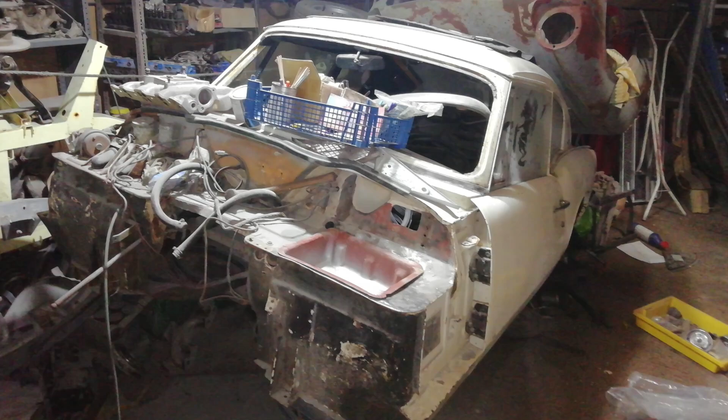However, in the last couple of episodes we've got it stripped down to a bare shell and it's ready to actually do some work. Now, this car has been off the road since 1983, and when I saw it first, the body was off the chassis. Chassis was stripped, engine was somewhere else in the unit, and the biggest problem to start with is that it's been sat on its floors.

It's been sat on some stuff that was underneath the floors all that time, so they're a bit bent. Now, the first thing I want to do is try and get those straightened out, then assess what actually is going to need cutting away and perhaps replacing. I really don't want to take the main floors out, and I don't think I'm going to have to. I'm getting close to deciding I'm probably going to have to take the boot floor out. But once we're happy with those, I want to lift the body off the chassis and check the chassis for straightness.

I don't really suspect there will be anything wrong with it, but as we're at the stage, let's just start, check against the workshop manual dimensions, and start from a clean slate. Then get the body back on and start to build up the rest of the car. So let's get started.

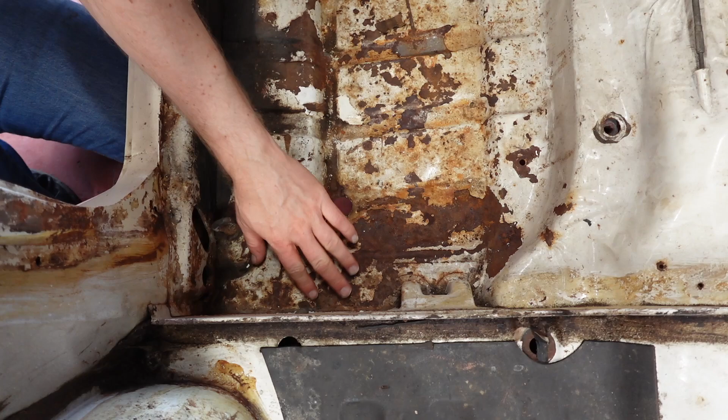Okay, so can you see what I'm getting at? There's clearly been something under here with the weight of the car on it, so I want to try and bring this back down somewhat. I'm not concerned about any of the actual structural bits because this all seems fine. That's a huge chunky piece of metal, so that's keeping that in place. But we've definitely got a bump up in the floor. Similar on the other side, and then in the boot too, and a little bit in the far corner, the other wheel arch. So I'm going to hit it with a hammer and see where we go.

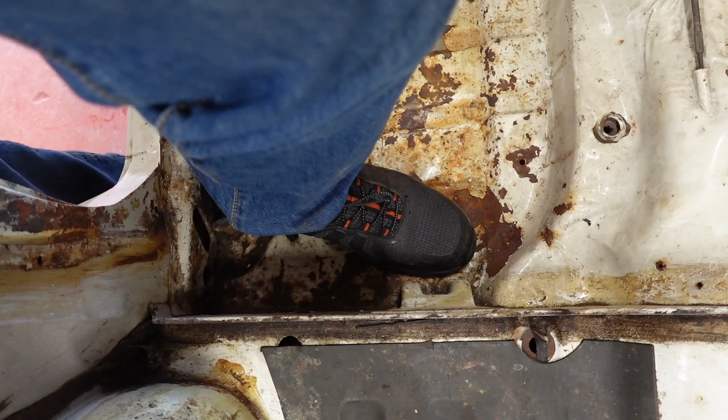I've already done a bit of this sort of panel beating, which has definitely shifted things.

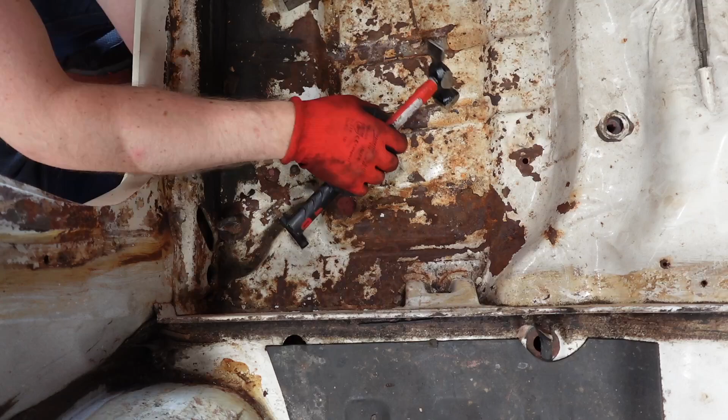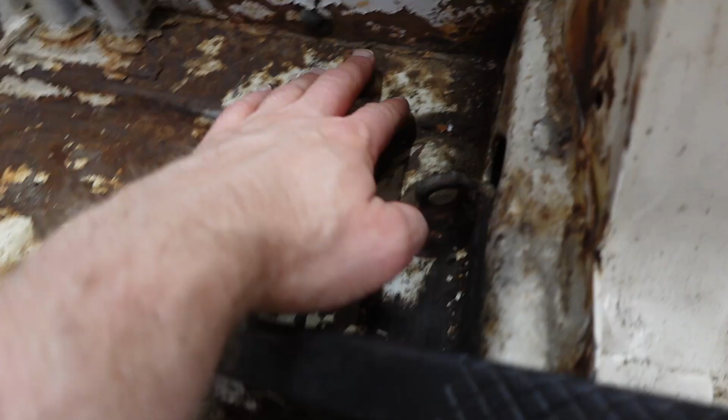So this seems to be going okay. That's flattish, I've got this down. That's looking flat. I think this sort of corner could go down a little bit more.

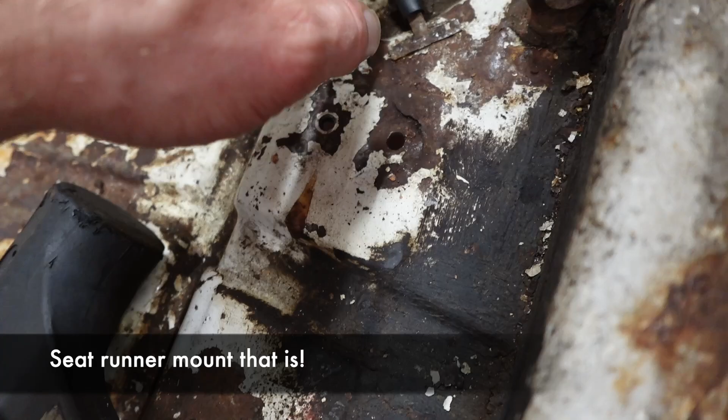Definitely knocked my way to finding some more repairs that need doing - the seat runner mount and a little bit here on the rear floor. This is where there's like a bracket underneath, you see, dark, which I believe is something to do with the paint lines when they were being produced, like an earthing strap or something like that. Anyway, there's a bit that's gone around there, but it's going alright, I think, which is good. Remember, these are floors as well, so if they're a little bit bumpy, I don't care. But I'm kind of hopeful that everything can be just restored to its acceptable level of flatness.

Mostly what I'm concerned about is the seat being able to sit in the right sort of place, and obviously nothing springing apart when stuff gets cut. Because I can feel this wing has been replaced at some point, and I can feel there's some repairs underneath. I don't like the way the sill is a replacement as well. I don't really like the way it fits. It's too far in, and also there's been repairs.

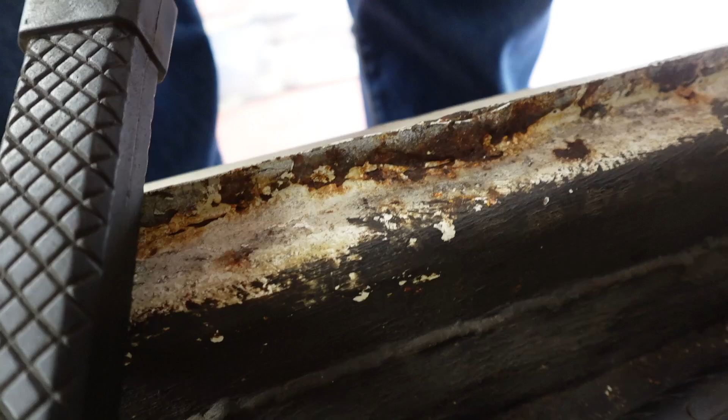I don't want to leave them like that, because who knows what's underneath. Generally, the standard of repair on this car appears to be pretty good, but I'm not taking any chances. So it's looking like I may want to take the sill off and redo some of whatever's happened to the inner sills and the edge of the floor and all that. Anyway, I'm going to get on and keep bashing.

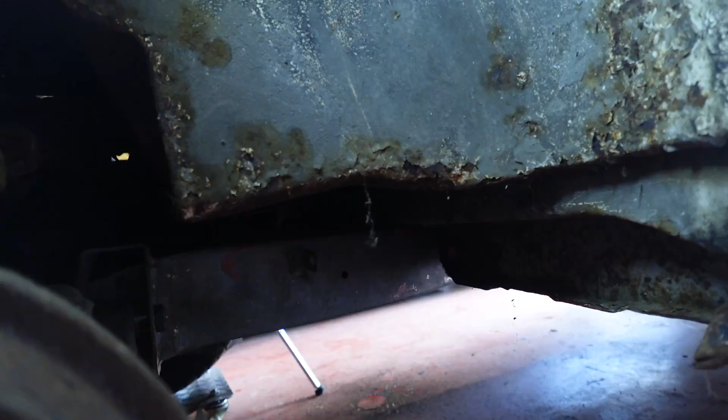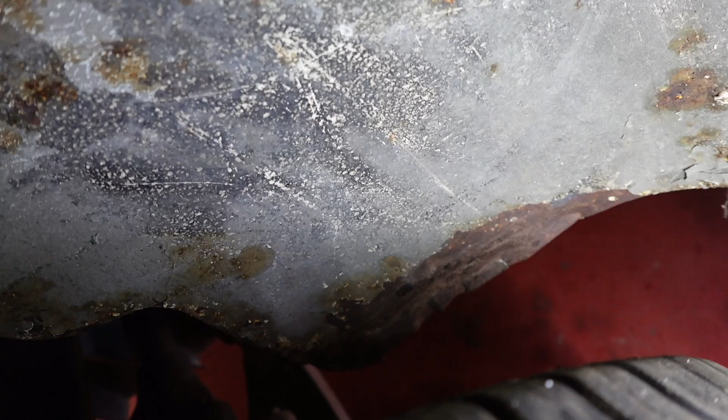Car on the ground, but I've got that sort of straightened out. I think I'm just going to replace the outer bit because it's just going to be easier. And you know, still, it's looking all right everywhere.

That's come up okay, quite nicely really. Got this floor done. It's a bit wobbly back here, but perfectly acceptable for a floor. I think I might preemptively replace the rear edge of the floor, because given it's rusty on the outside and there's not a lot of sealer left, it's going to be rusty in that joint. Probably worth just doing it.

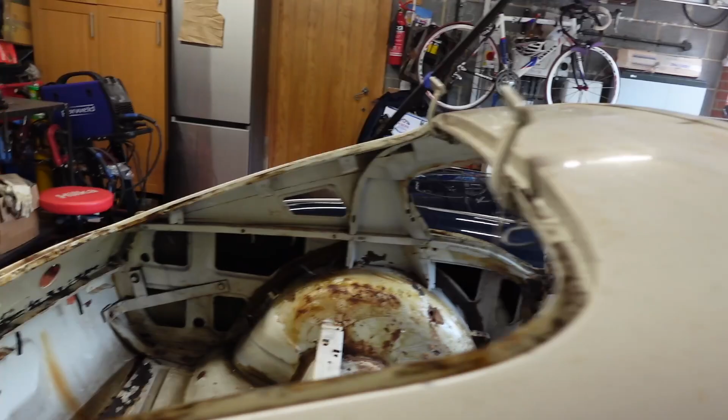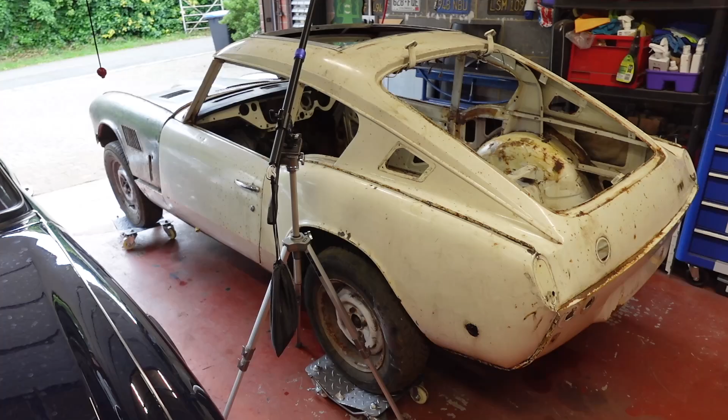Anyway, I think my next challenge is going to be to lift the body. I'm hoping I can do it with the crane. Still mixed on the boot floor, I'm leaning towards wanting to just replace the panel, but still time to think about that. So it's going to be shuffle the Spitfire outside and see if we find some points to strap the body up and pop it up. I think if I'm going to do that today, I'll just try to lift it a bit, because it's going to have to come off. I'm going to have to sit the body somewhere, do all my chassis measurements, and then put it back on, because there's no way for it to sit for any elongated period of time. So I'm going to work up to that.

Actually, I was surprised at how well this bitumen underseal, or whatever it's called, sound deadening came off. Just a bit of warmth with the heat gun and the scraper slid right under and it all nicely peeled off. I left most of it in place on my Spitfire because it had been painted over 300,000 times and didn't see the need. I may even leave that bit in the corner. Probably wise to check underneath to see if anything's rusted, because that had.

So I've got the crane out. Now what I want to try and do is lift the body off the chassis. I don't have a lot of time today, it's just a Thursday afternoon, so I'm not going to get to do a huge amount. I want to see if it will lift high enough to clear the chassis without hitting any bits of the garage door. Let's see if this is going to work.

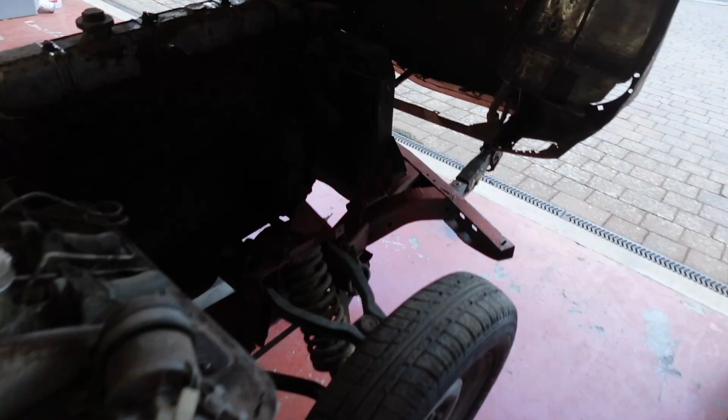Okay, so that works, which is great. I haven't tried to land it exactly in the right place on the chassis yet, because I want to lift it off again. There's apparently some repair needed on the chassis, but it could just be - I won't be able to see now the body's back on - but the end of this outrigger was split. So it could just be that. Obviously when the body's off, I'll be able to investigate that.

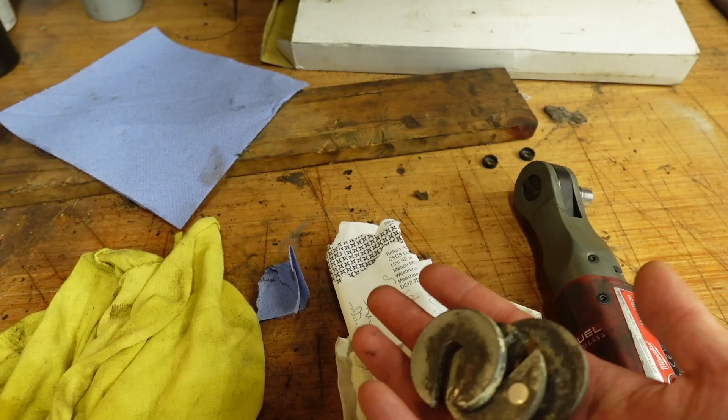I'll be able to check if it's straight, and then I've gone and searched through all the bolts I've saved or had new, and got all the proper body mounting washers. So I have the bolts. I've got a full set of what I need to mount the body.

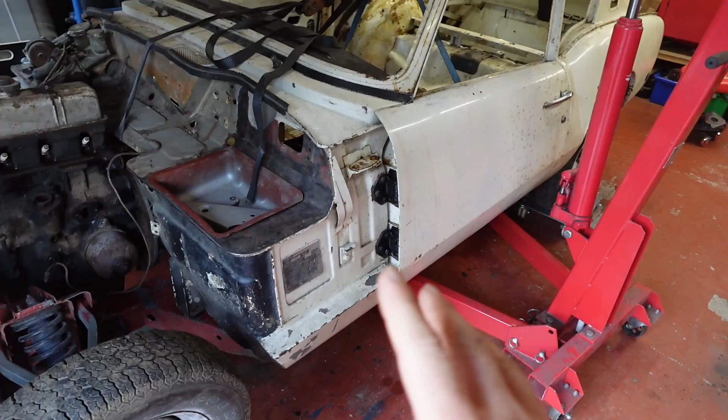So when I'm happy with the chassis, I will get the body properly mounted in place, and then we're going to know we're in a good state to actually start doing repairs to the structure of the body. Now obviously with the GT6s having the roof, they are much more rigid, so there's less of a worry. But having it on the chassis, if we know the chassis is good, we know the body is positioned as it will be eventually, then we know we're in a good state to start.

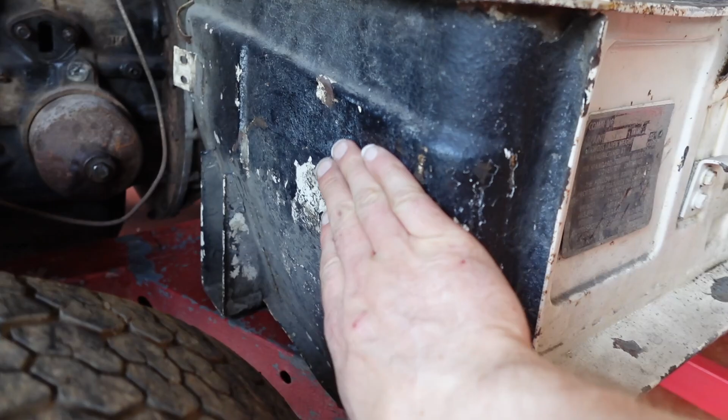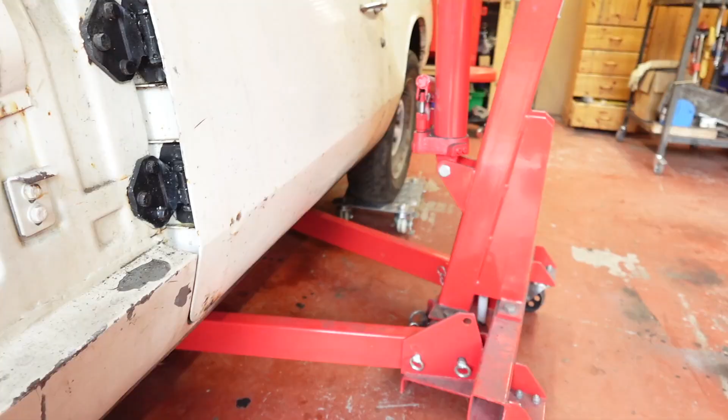So while I'm not going to get to lift this off and do all that till the weekend, I thought maybe I can come here, because this is badly dented. My guess for what happened here is that the trunnion broke, because that looked very much like the tyre smacking into the bulkhead there, which is what would happen if you snap the bottom of the vertical link where it sits in the trunnion. So I'm going to get the crane put back away and start smacking that with a hammer.

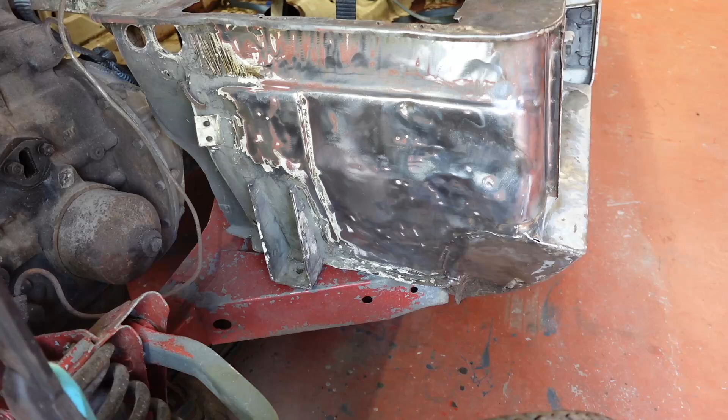Luckily I've got easy access to both sides. So I've had a go at this, I used one of the stripping discs, the end of one of the sort of poly stripping disc things, and then the wire wheel. I kind of attacked around here as well. I thought I found lead, but then actually there wasn't anything there. But the repairs are - I feel I'm going to have to cut it off. Don't like it. Problem for another time.

Anyway, so this is obviously quite pushed in, and I'm just going to see if I can bring it out. I'm going to try and block it with a rubber hammer, a bit of wood, and then move on to actual hammers and dollies to try and make the shape nice. There is a bracket in there which I would like to avoid removing, but it's going to depend on how well this kind of pops back.

Okay, so I got that out okay. Probably needs a bit more, but I have to clean up what's remaining. We're roughly the right shape, so it's going to be kind of trying to reintroduce that crease and flow.

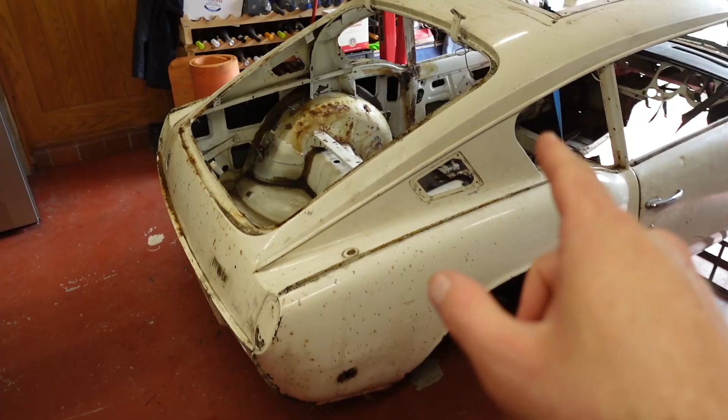Right, so that's off for the moment, sitting on some stands and a bit of wood on the feet of the crane. Only temporary, obviously. Now, let's have a look at the chassis.

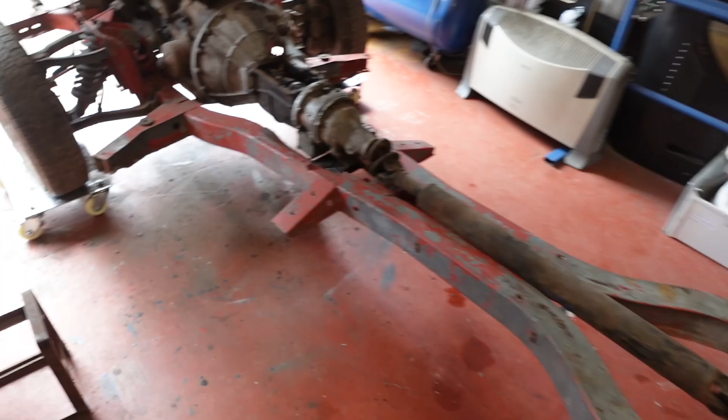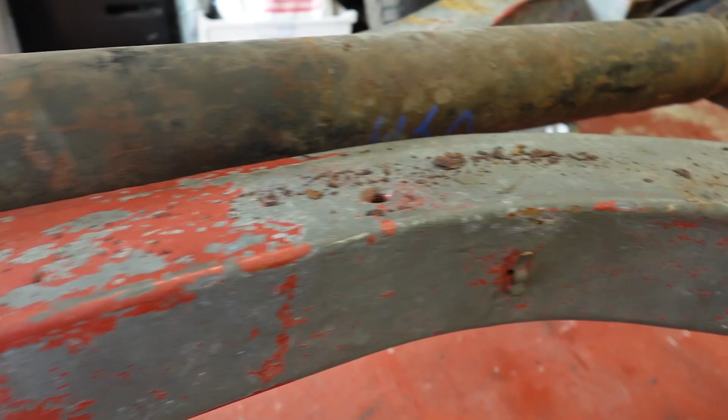I mean, it's all looking alright, which is what I expected. I thought this was galvanising, but it looks more like this was zinc paint, or just grey paint.

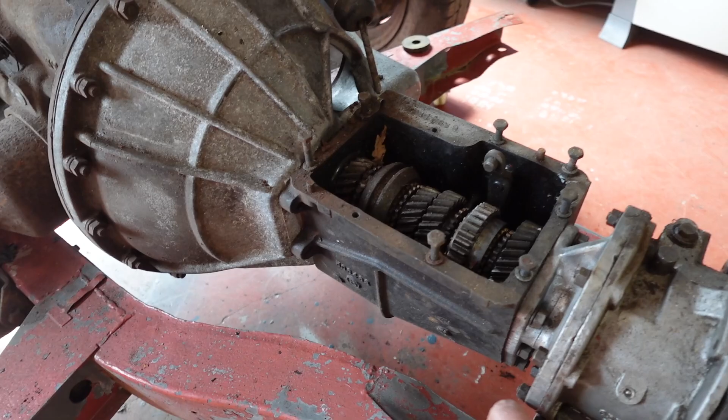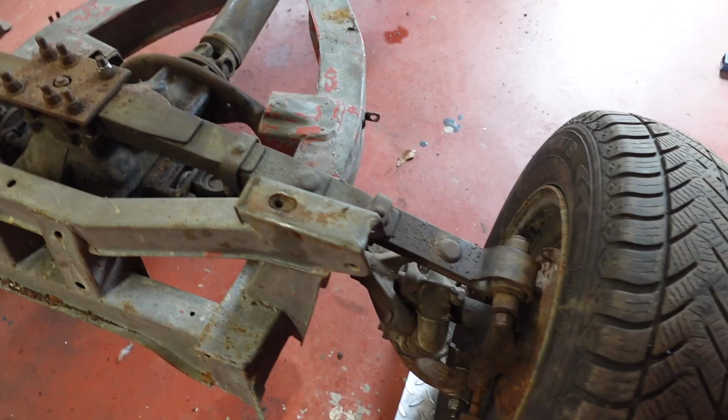Now the fellow I got it from did say there was a bit of welding to do on the chassis, but only a tiny bit. I don't actually know where he was thinking. Unless it's this, because that obviously does need doing.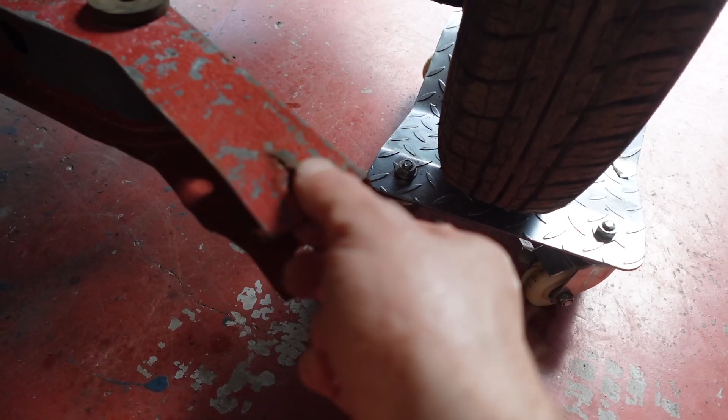Can't see anything else. It's missing a cross tube as well. Well, do they ever have cross tubes? It doesn't have a cross tube, just got to get one.

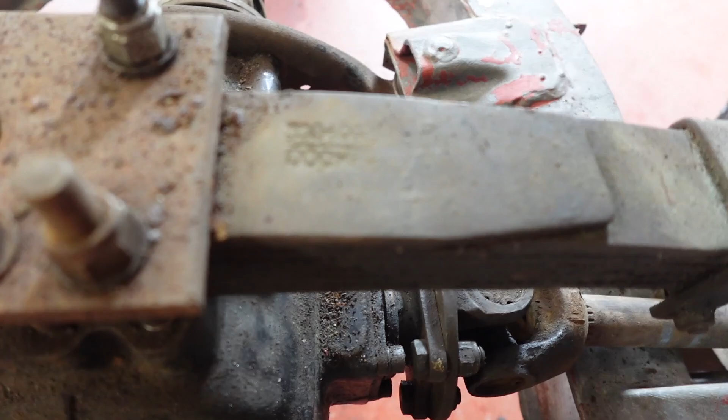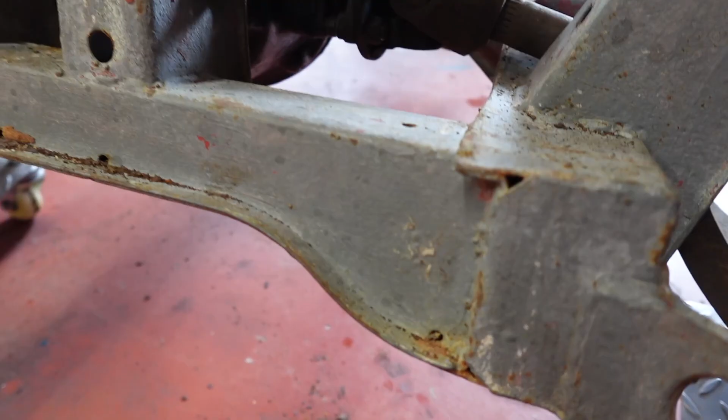There's some knackered looking Rotoflex. I wasn't planning on retaining the Rotoflex anyway. Going to buy a CV axle conversion kit, I think.

Well, I mean, that all looks fine. Let's get on with some measuring then.

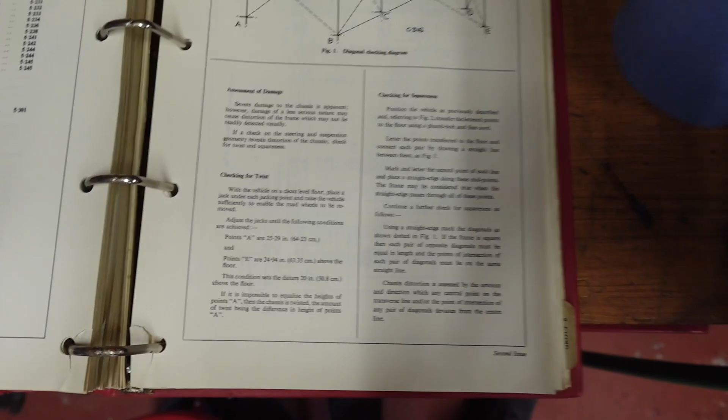Now what that involves is jacking the car up, and you can do this with the body on clearly, but we're able to take the body off, and it's going to make access to most of it a hell of a lot easier.

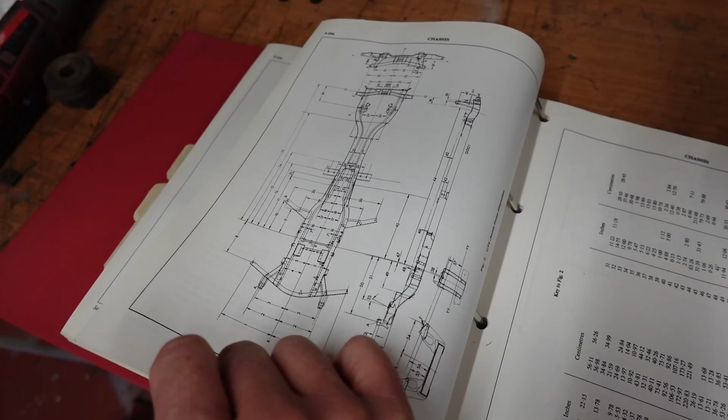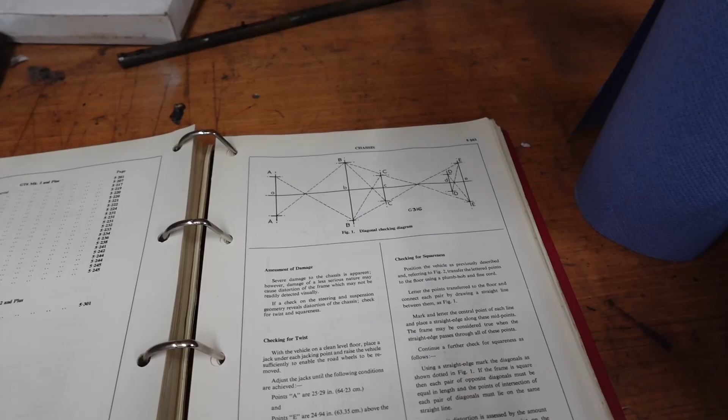Anyway, so jack the car up, there's some points on the chassis to measure, more clearly detailed on that diagram over the page, and then you're doing cross triangulation type measurements. So I'm going to get on with that. And I think I will film a bit of a 'here's how we're going', rather than, you know, watching me chalk lines all over the floor. See you in a bit.

Okay, so I've not got it quite to what's specified in the manual, but I do have it so the points you have to check first. So this and that are labelled E.

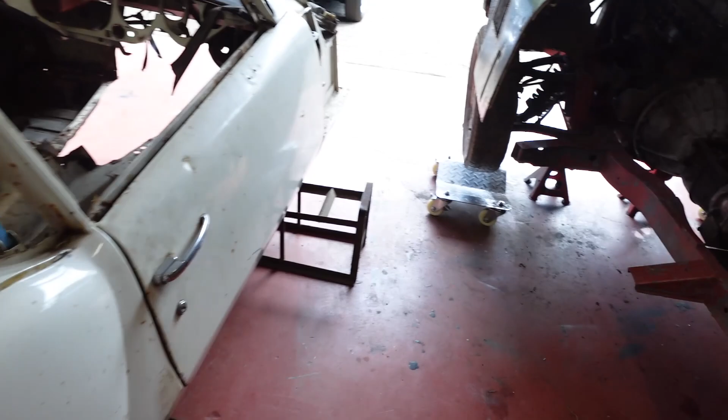In the centre of this bolt, and the equivalent over here are labelled A, and I've got those so they're equally high off the floor. Which means, while I've not got the exact measurement yet, it's not twisted, which is, you know, good to know. In fact, is that all they want you to measure?

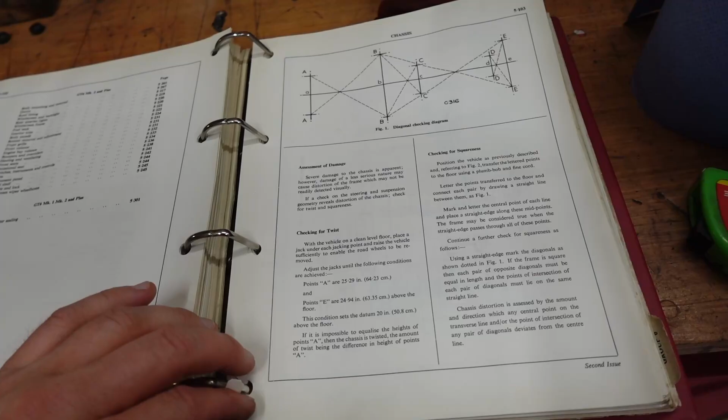Well, regardless, there's nothing to... it'd be better to do this check, whether that will be normal practice or not.

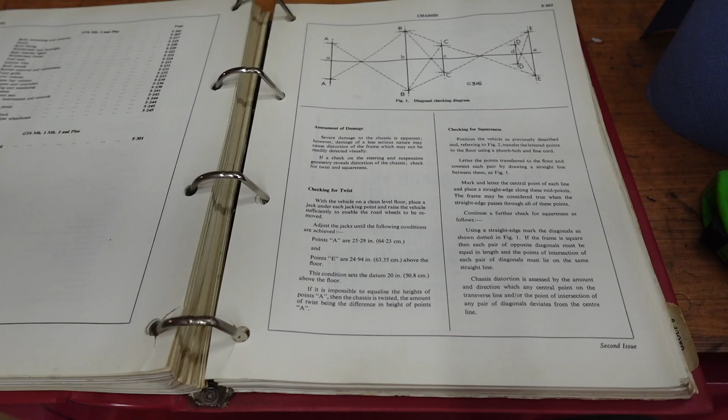So I'm going to work on getting the front a bit higher, because it needs to be. I've currently got 63.35 on the rear, and I need to get the front up. Front's about 58 at the moment, so let's see if I can get it exactly to match, and then go from there.

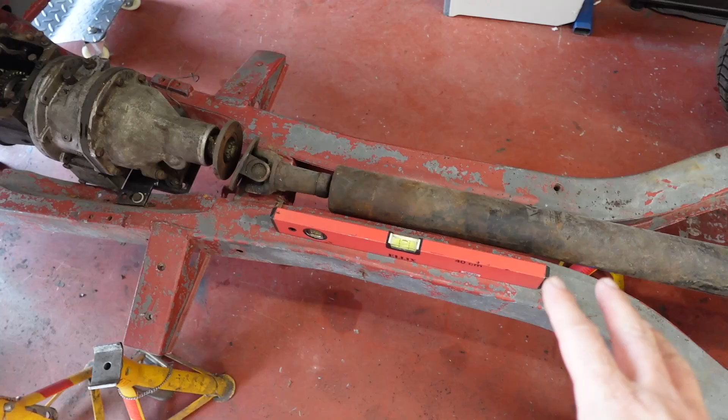Right, so I've got it right, and the reason I was confused - I've had the spirit level on the frame because it makes sense that for checking straightness it would end up level in the centre of the chassis, and it wasn't when I was following the manual.

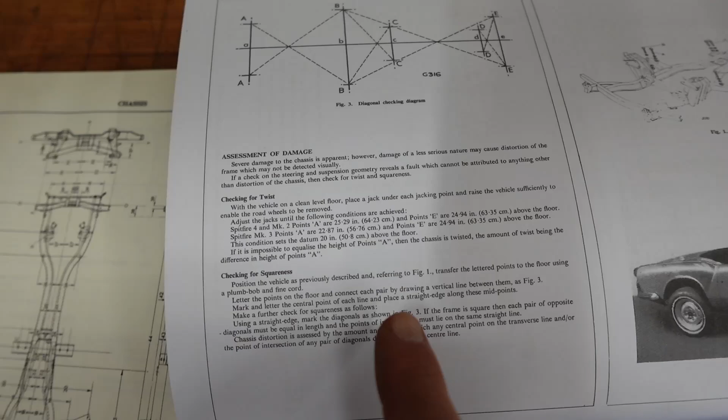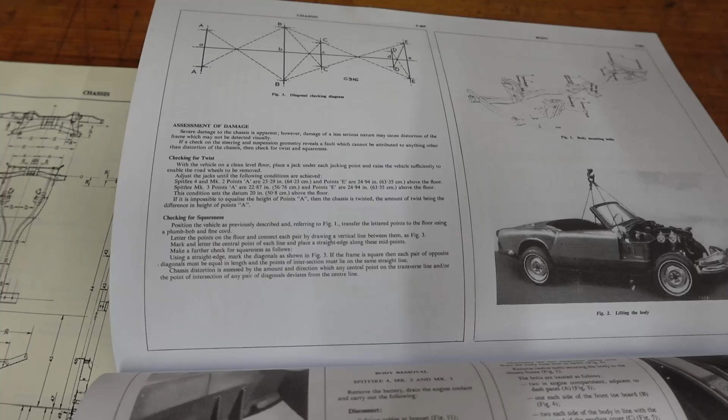I've had a look in the Spitfire manual, and it gives different dimensions for the Spitfire Mark III than the Spitfire 4s, which makes sense because the front of the chassis was redesigned to cope with the bonnet redesign. The GT6 manual I've got doesn't refer to that change, even though the chassis changed the same way. So using the Spitfire dimensions, I've got it right.

So I'm going to commence with drawing stuff on the floor. I've gone around and dropped all of these marker points down to a mark on the floor with a plumb bob, and then measured the centre line between them.

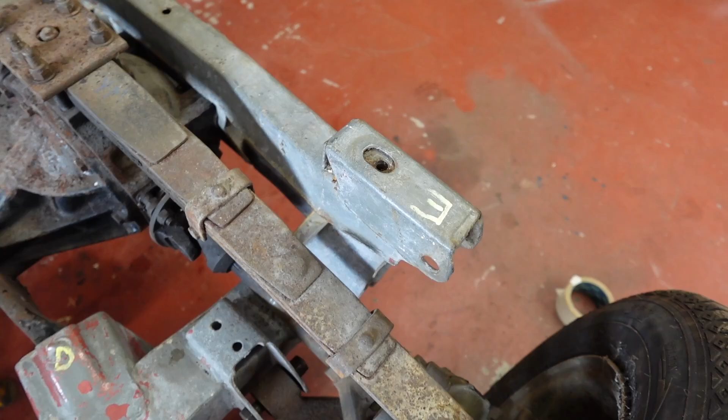So I've got this shock mount, strut top, or would be a shock mount - I don't think it's used as that on the GT6, is it? The centre of the diff bolt, the front diff nose mount bolt, this body mount hole, that body mount hole, the outrigger, and this hinge mount.

So I now should be able to lay a straight line down the middle of all of them. Okay, so within margin of error for using a paint pen, that outrigger is definitely twisted, and little bits of these have been pinched in as well, so I don't think I'm getting the best of measurements, but I'm getting an acceptable lineup, I think.

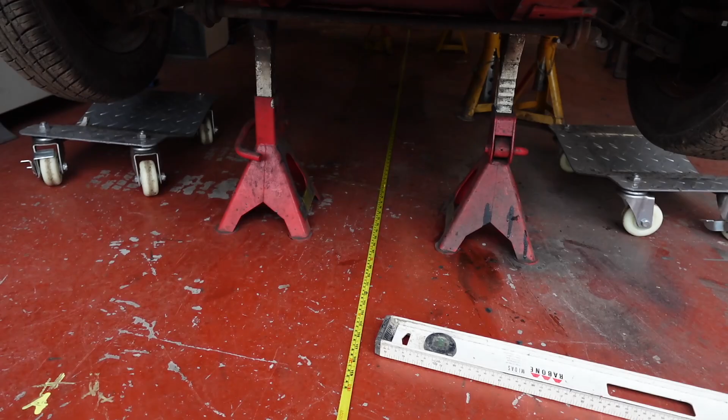Obviously I had no reason to suspect this chassis was bent, but as we're at this stage, I just wanted to check. So I'm going to go around and clean up all the captive bolts, captive nuts for where we're going to put the body back, then put the body back.

For the curious, before I put all this back together, I thought that was quite interesting to be able to see just how close the engine is to the bonnet, because this is obviously sitting low, sitting on the engine, but you can see up there at the front where the radiator sits and the radiator top hose, just how it fits in the bulge.

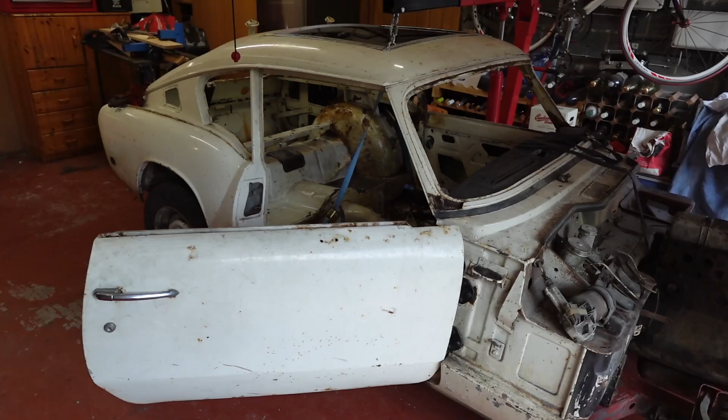Anyway, I've got all my holes tapped, so I'm going to get the body back on. And there we go, back on the chassis. I have got most of the bolts in.

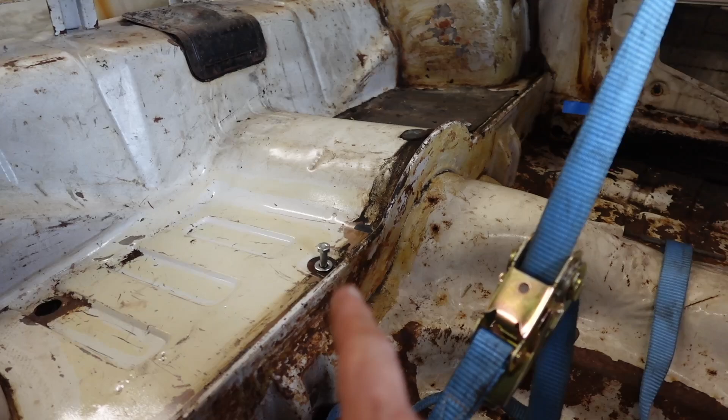I've got the front two, the rear two, which are the ones where the actual spacers go underneath of. I had a bit of a struggle with these two - probably because I forgot to tap the holes in the chassis, or re-tap them, because they just wouldn't bite. But I've managed to deal with them. I'm missing one for that side, can't get that one quite in, but otherwise I'm fine.

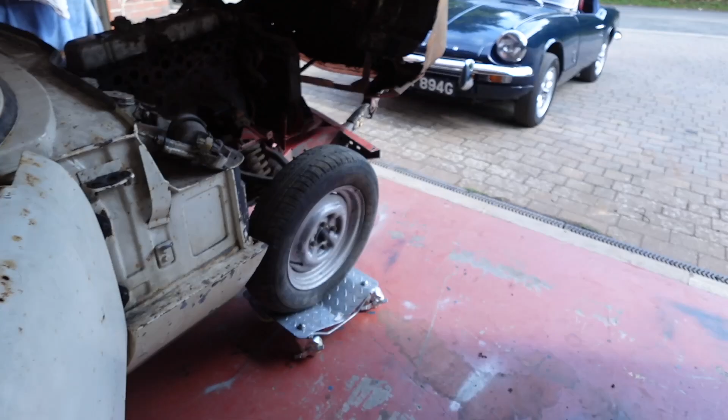I'm happy that it is in the right place and at the right height, because we've got the aluminium spacers under here and the rear spring tunnel mount things.

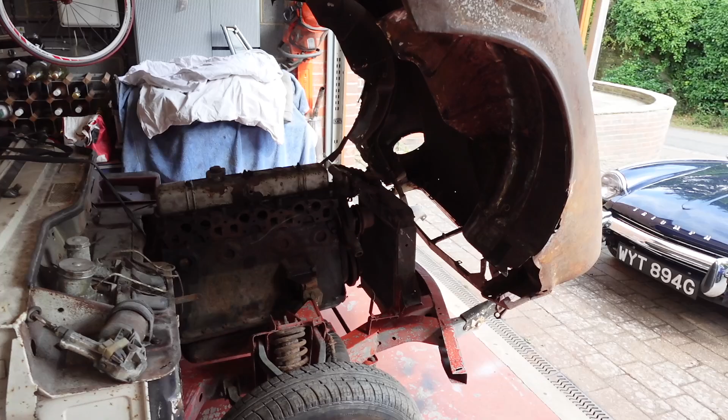So basically, if the body is in an okay position, I'm happy to try and fit the bonnet to it. And the bonnet is one of the first things I want to tackle, because this side has been disassembled, so it's all wobbly.

But that will be something I will do in the next episode. I'm going to just get this cleared away, get the crane put away and all that, and then possibly tomorrow for me, I'm going to start looking at the bonnet.